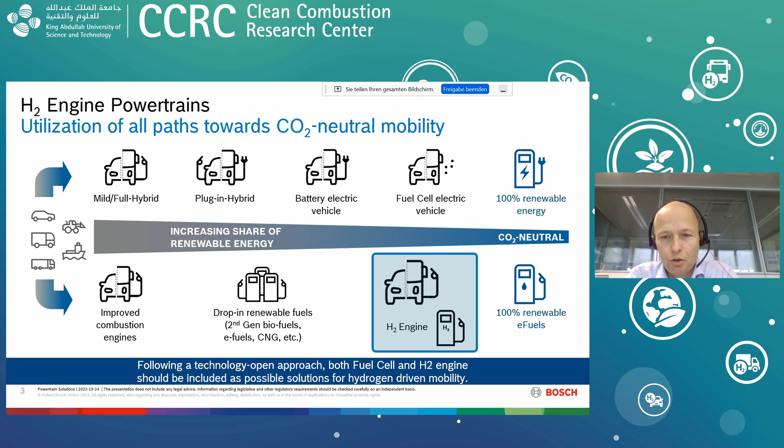Now we take a look at air quality, development of air quality in EU cities, in urban traffic hotspots. Most important pollutant components from our point of view are NOx and PN. Air quality wise, they are looked at as NO2 and particulate matter 2.5, so smaller particulate mass.

And when we are looking at the potential that is brought on the road by modern diesel and gasoline powertrains like Euro 6D ready powertrains that are step by step introduced into the EU vehicle fleet, and we measure the pollutant emissions of these modern vehicles in urban traffic hotspots, like we have one here in Germany in Stuttgart, we realize that the tailpipe emissions are very, very low, significantly below the current limits.

And when we then use these tailpipe emissions to calculate the contribution to the air quality situation at this local traffic hotspot in Stuttgart, shown on the right-hand side, we see the diagram of NO2 air quality, where the limit at the moment in the EU is 40 micrograms per cubic meter. And we see the situation improves from 2015 to 2020 already. Of course, there might be an impact of the COVID situation here.

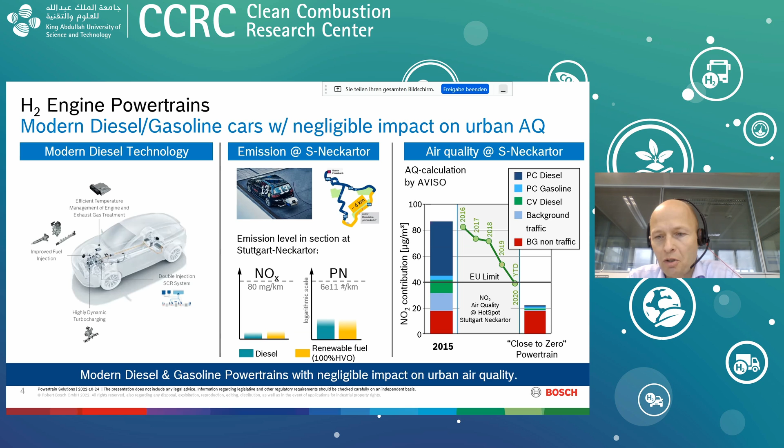On the next slide, we see the situation for particulate matter, where on the left-hand side you see a picture of 2013. Road transport, the red part of the cake, is about 20% of the PM 2.5 emission situation in the EU. And road transport basically consists of 4 components. One is PM coming from the exhaust gas. The second contributor is road abrasion. Third contributor, brake wear. And the fourth contributor is tire wear.

And now on the right-hand side, we look at the situation in the UK, which I think is pretty representative also for the EU as a whole. We see that via the introduction of modern emission technology, for instance, the particulate filter, the contribution of exhaust to PM 2.5 is massively reducing at the moment. And that is even before any introduction of battery electric vehicles into the EU fleet or into the UK fleet.

So massive reduction. And in the near future, it is already projected that the exhaust emission contribution of road transport to PM 2.5 is actually the smallest contributor of all 4. So also regarding particulates, we can state that with modern technology, the current gasoline and diesel vehicle fleet will have a negligible contribution to PM 2.5 emission.

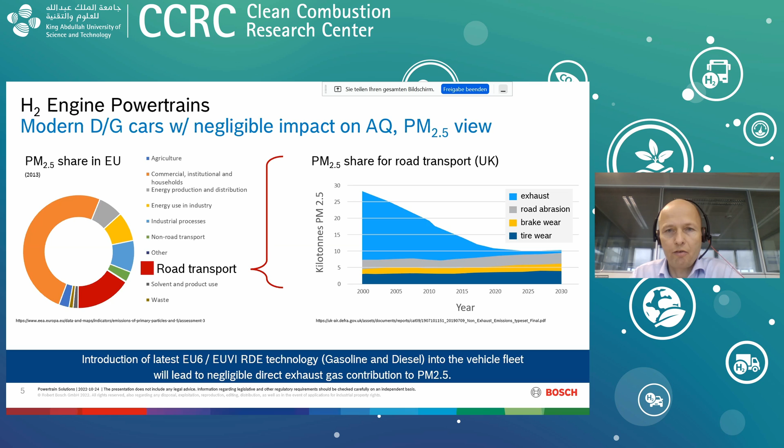Now let's look at the case for hydrogen engines. Scientists at the Karlsruhe Institute of Technology in Germany have looked at the technology with a multi-criteria assessment. Some questions are open, but up to now, no exclusion criterion for H2 engines has been found. They contribute to very effective and pretty highly efficient fulfillment of energy goals and of course CO2 reduction goals.

They increase the resilience and the robustness of the transport system by simply relying on another energy carrier. That makes the society more robust and more resilient compared to a situation where we only rely on one energy carrier. We see in Germany at the moment what the situation can be.

Also, when we look at the contribution of the technology to welfare, for instance, social cohesion, we can see that this technology is interesting because it does not rely on scarce raw materials that are available maybe only in some parts of the world. The value chain is very nicely established already from the small supplier to the large OEM, even to after sales. So the job opportunities of these technologies are pretty interesting. So very interesting technology from this multi-criteria technology assessment, no exclusion at the moment.

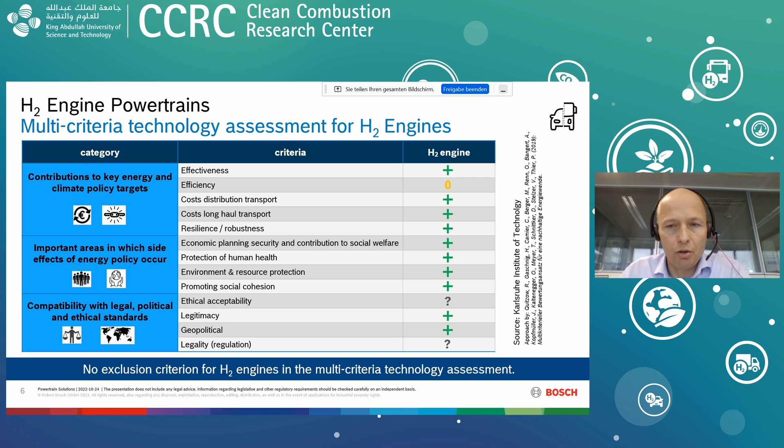And that is also what we are seeing from our customers, from our OEMs. The interest in hydrogen engine technology is massively increasing over the last years. At the moment, Bosch is in discussion, planning or running H2 engine projects with more than 130 OEMs worldwide in all segments of mobility. That starts, of course, with heavy duty and agricultural machinery, because these powertrains have limited other technology options to achieve CO2 neutrality.

And also, mostly they do not require a fully developed H2 refueling station network, because the large heavy-duty long-haul trucks are using a fixed road network and basically always the same tracks. So by strategically positioning the H2 refueling station networks, you can already achieve a full capability. So that's very interesting, and that's happening currently in the EU.

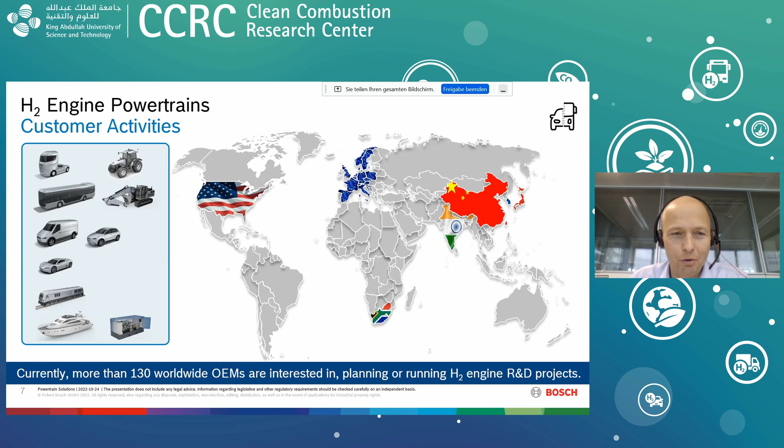And what does the hydrogen engine look like? That is mainly determined by the properties of the hydrogen fuel. Of course, you would like to have a high mixture calorific value in order to get the most power out of the engine, and that points to a direct injection engine that is turbocharged or at least boosted, as compared to a naturally aspirated engine. Also, interestingly, the auto ignition temperature of hydrogen is very, very high. And this clearly points to a spark ignition engine, not compression ignition.

Ignition limit lambda range is, let's say, massive. So you can ignite a hydrogen-air mixture that is very rich, but you can also ignite a mixture that is very, very lean. And the good thing, it can be homogeneous lean engine operation. It's not required to do some stratification, which of course, as a homogeneous combustion, has advantages regarding NOx formation, but also of course contributes to high efficiency.

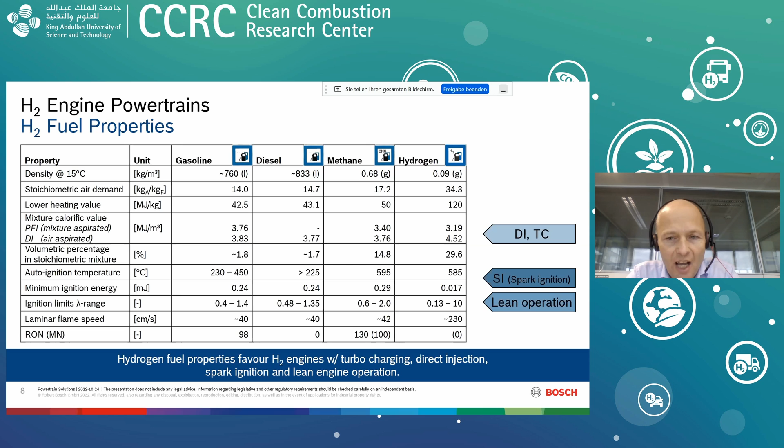However, we might also see lambda 1 operation in some cases. This is especially interesting for high performance engine powertrains, where you maybe have issues to run these engines very lean because you do not get the air supply by the boosting system. And that points to lambda 1 operation, especially at high load. However, here you would need a combustion moderator, for instance, water injection.

Now let's look at the, let's say, mainstream system layout of a hydrogen engine. On the upper right hand side, air is introduced into the system, flows via the air filter through the compressor of the turbocharger, charge air cooler. Then we have the throttle flap, and then the intake air is introduced into the cylinder.

The fuel path is starting with a preferably 700 bar gaseous high pressure tank. You then have a pressure reducer to a pressure of roughly 20 to 50 bar. That is then routed to the pressure regulator, which is positioned close to the engine. From there, we go to the fuel rail, and from the fuel rail, the fuel is distributed either towards the PFI injectors or towards H2DI injectors.

Then we have the ignition, where the ignition system has a little modification, coil, spark plug. The spark plug needs to be very cold to avoid irregular combustion from the hot surface of the spark plug, but that is doable. Then you have the combustion, and the exhaust gas is then routed to the turbine and drives the turbocharger, and then it goes to the exhaust after treatment system. Optionally, you could have a cooled external EGR.

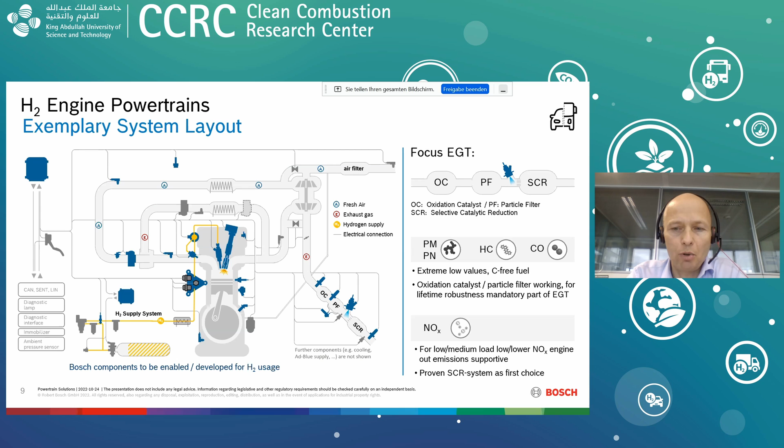What is Bosch bringing to the table? A lot of our components are available from gasoline and diesel applications, or can be derived with small modifications. Of course, we need the H2 fuel system and especially the H2 DI injector. These are new developments here. Development is ongoing.

Bosch is developing H2 engine control units and software solutions that include the actual engine control, the AdBlue dosing control, and the hydrogen storage control unit, and the respective software solutions as well. Of course, e-Powertrain functionalities for the hybrids. And Bosch is also developing, together with partners, gaseous H2 tank system solutions. So we are positioning ourselves, that's our goal, to be a system supplier.

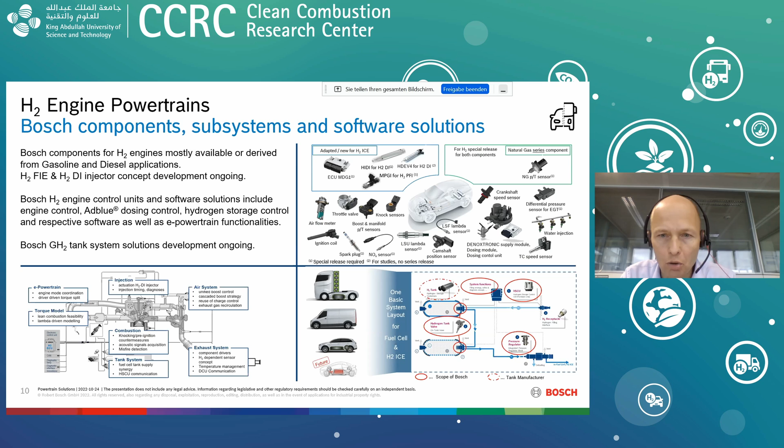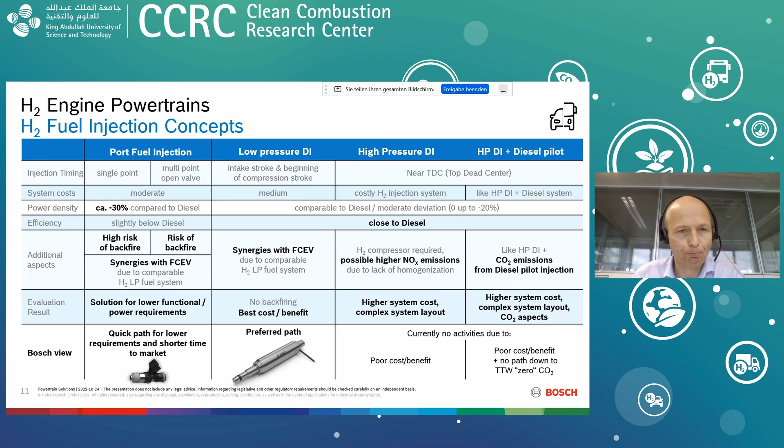When we have an H2 DI system, we would like to inject the fuel after the intake valves are closing. That gives us shorter mixture preparation time and shorter time for homogenization. But we want to have this kind of injection strategy because by this we would avoid interference of the H2 fuel injection with the intake air.

Hence, we need to have as much as possible air inside the cylinder after the intake valves are closed. That's why we are targeting closed valve injection. So after intake valves are closed, and that gives us less time for homogenization. That's why we are targeting to support the homogenization process by guiding of the jet, which is

normally, when we do nothing, we have basically a hollow cone jet, like we have it in typical gasoline outward opening injectors, for instance, for the stratified injection system or stratified combustion systems. So that is basically the hollow cone that is formed when we do nothing. This configuration has the risk of getting early contact in a center mount position, but also in a side mounted injector position, early contact with hot surfaces like the spark plug or maybe the exhaust valves.

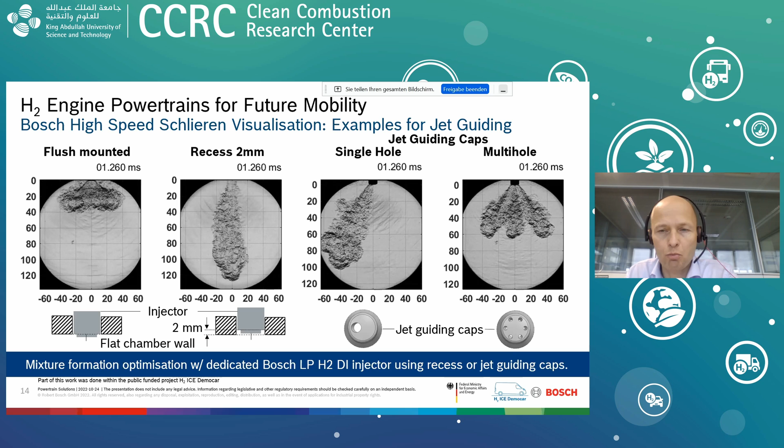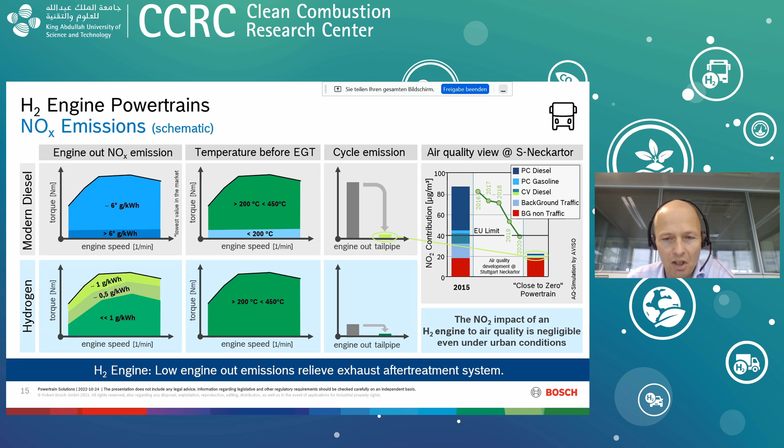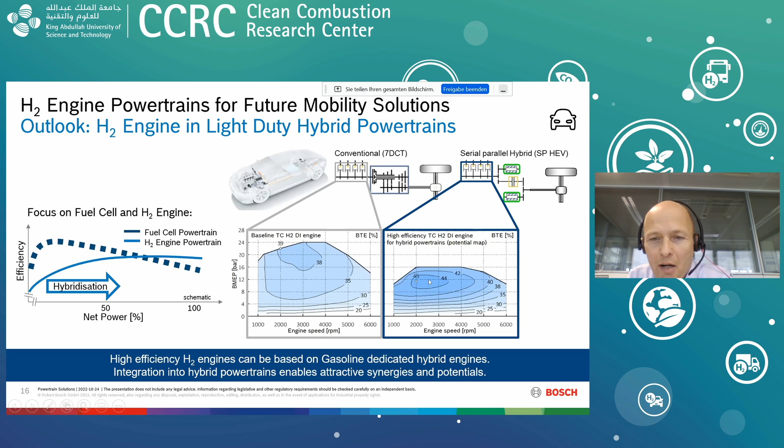One, we can avoid engine operation in the high load where we have some issues to provide sufficient air to the system. So skip the high load operation and reduce NOx. And the second option that we have used here is use the degree of freedom that we have in order to optimize efficiency like we do it for the dedicated gasoline hybrid engine already in the sweet spot. And when we are doing this and looking at the hydrogen consumption of these two powertrain options in a medium class sedan, WLTC H2 consumption, the conventional powertrain has around 1.6 kilograms per 100 kilometers H2 consumption, and the serial parallel hybrid has around 1 kg per 100 kilometers.

So we can reduce fuel consumption by this approach by roughly about 1/3. And when we look at engine out NOx, especially in a highly dynamic driving cycle like the RTS 95, the simulation shows us also what we have expected, that we can reduce engine out emissions significantly by avoiding running the engine under high load operation. So engine out NOx is significantly below future Euro 7 limits.

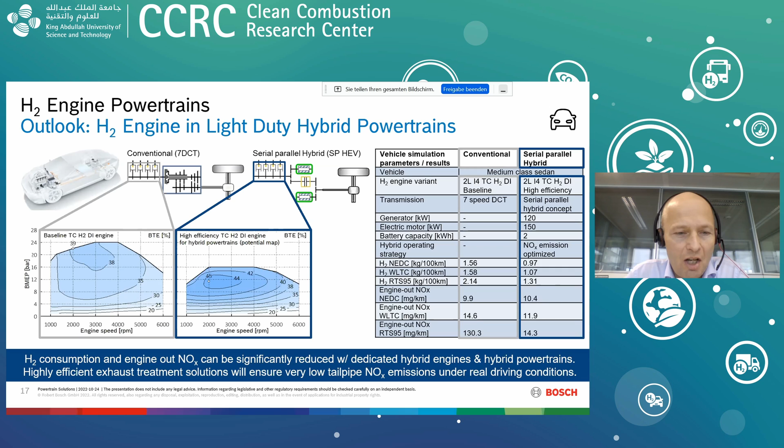And now we add the AdBlue SCR system with roughly 90% conversion efficiency over the complete cycle. And then we are arriving at maybe 1 to 2 milligrams NOx emission per kilometer. So we would, let's say, definitely consider this as zero impact. So that's a very nice option here. I would like to wrap it up.

We need a technology open approach. That's more and more clear. Because only the technology open approach leads to the best future powertrain solution for each application. And here, of course, battery electric, fuel cell and H2 engine are complementary.

The introduction of latest emission technology into the vehicle fleet will already lead to negligible exhaust gas contribution to the air quality due to better initial conditions. That means engine out emissions. This also applies to H2 engines. We are seeing significantly increasing worldwide interest in H2 engines.

We are working on components, subsystems, and software solutions to position ourselves as a system supplier for H2 engines. And we on Bosch side, we are convinced that H2 engine powertrains will become a very important part of future mobility solutions. Thank you very much for your attention.

Erik, that's a great presentation. Thank you. I think we've got time for a couple of questions, if there are any from the floor. Yes, one. Hi, good morning. It's a nice presentation. I have a question regarding... I think the microphone's not on.